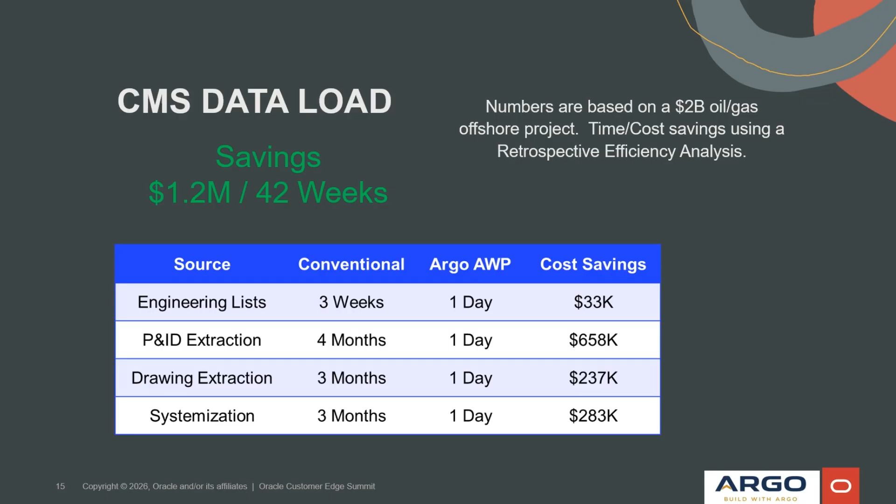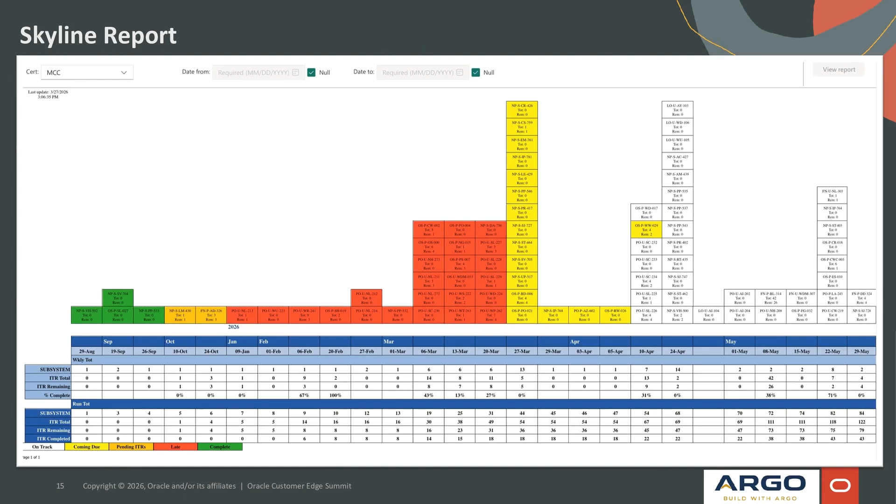Without our solution, the commissioning team is performing daily walkdowns of the upcoming subsystems, attending construction meetings, and meeting individually with the construction team to assess the condition of the upcoming subsystem. Reports like the Skyline report are essential and still necessary, but they do not provide insight into the construction progress. They're just a static view of what needs to be done.

By using our unified solution, the majority of these tasks become simple data interrogations with reports like this subsystem readiness report. Now, the interface time between construction and commissioning becomes about resolving any roadblocks that were discovered with these reports. A much more efficient use of time.

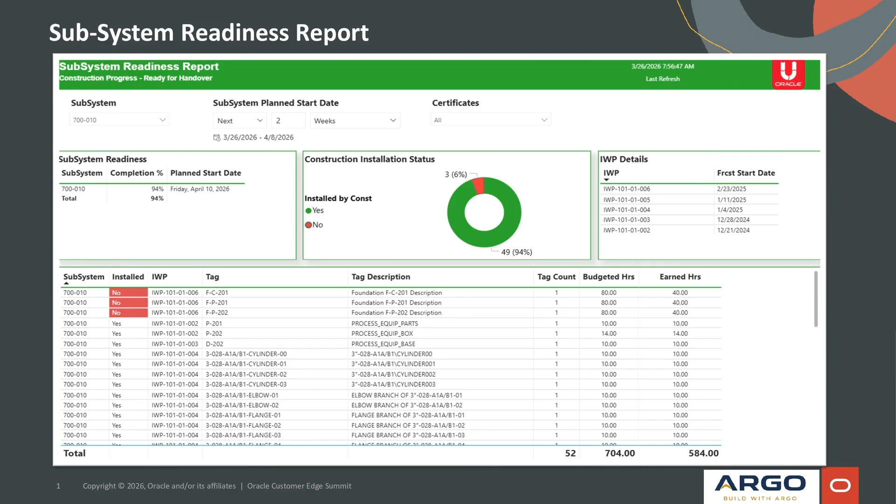We can switch over to the model view now and isolate these tags. As a turnover coordinator, we already know the 3 tags we need to discuss, where they are in the facility, and how far along they are in the construction process.

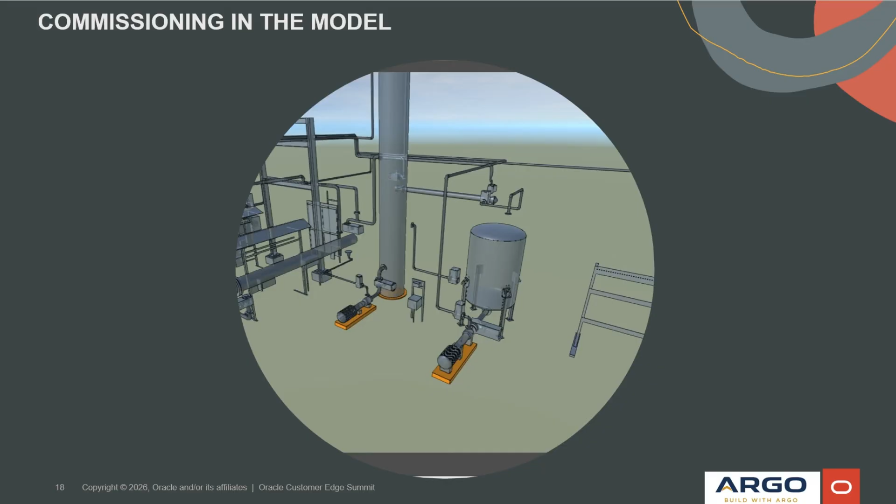This means our meeting with the construction counterpart is quick and direct, and we can both get back to work. This is a two-way data flow, so in addition to seeing the commissioning status in Tracker Check, the information is also pulled back into Unifier and displayed in the model for near real-time visualizations of the commissioning status, which is visible to construction and to the client.

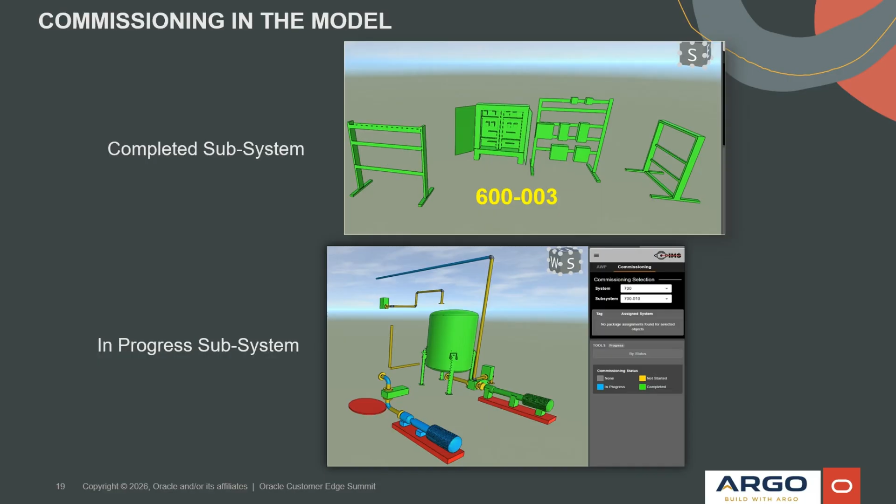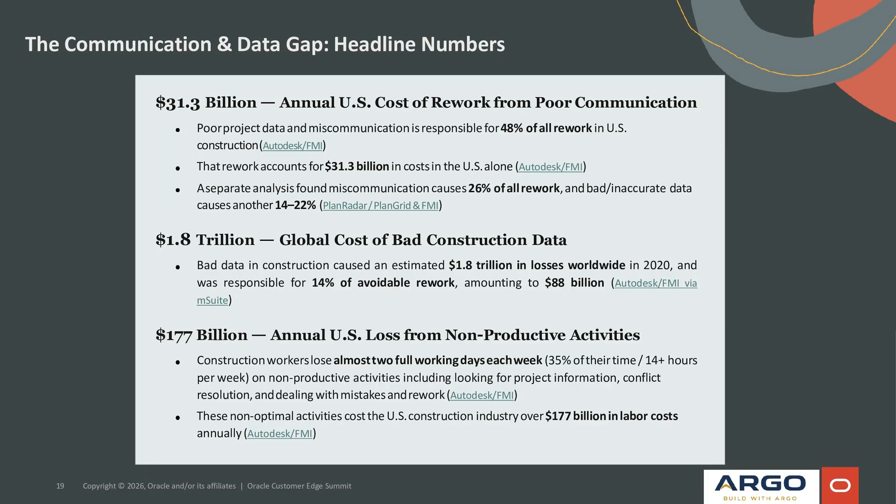In the end, this is the biggest benefit with a consolidated package and the driving force behind our decision to unify our products. Lower costs, head off problems before they start, common data, repeatable workflows, and a team environment working towards a common goal, all of which de-risk the project for the owner, which is a win for everyone involved.

Now let's take a look at the commissioning data from both the AI and model perspectives. Let's start by getting a high-level view of commissioning progress across the project.

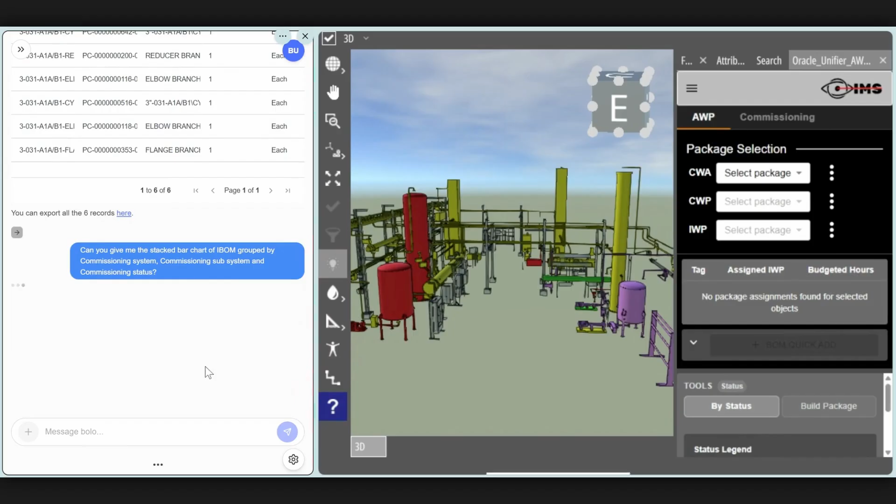We can ask the AI, can you give us the stacked bar chart of IBOM grouped by commissioning system, commissioning subsystem, and commissioning status? This gives us a clear view of how work is distributed and where we currently stand across the different subsystems. Now let's focus on a specific subsystem to understand this in more detail.

We ask the AI to give us the list of IWPs, their forecasts, and the actual dates associated with subsystem 700-010. Here we can see all the work packages linked to this subsystem, including their planned and actual timelines.

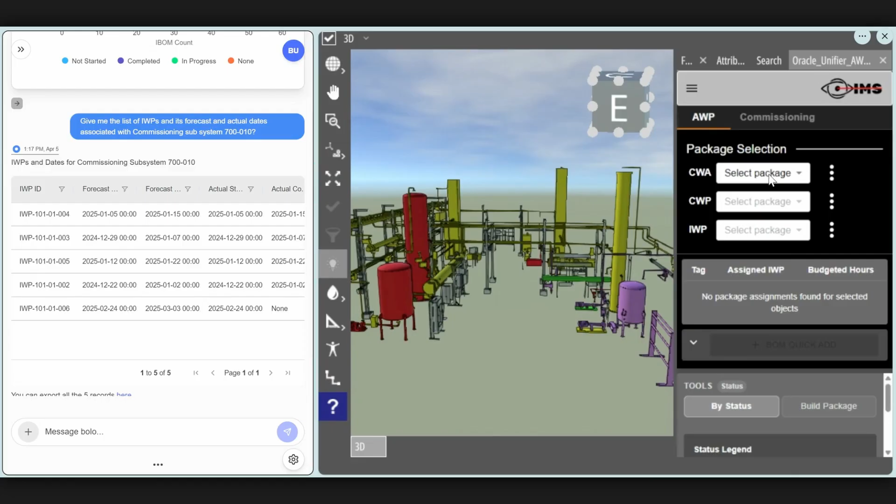Now let's look at the model for the same subsystem. We click on the Commissioning tab and select the system. Once we select the system, it highlights only the materials associated with that system. Now let's select the subsystem. Let's zoom in a bit. As we can see, the different colors represent different statuses.

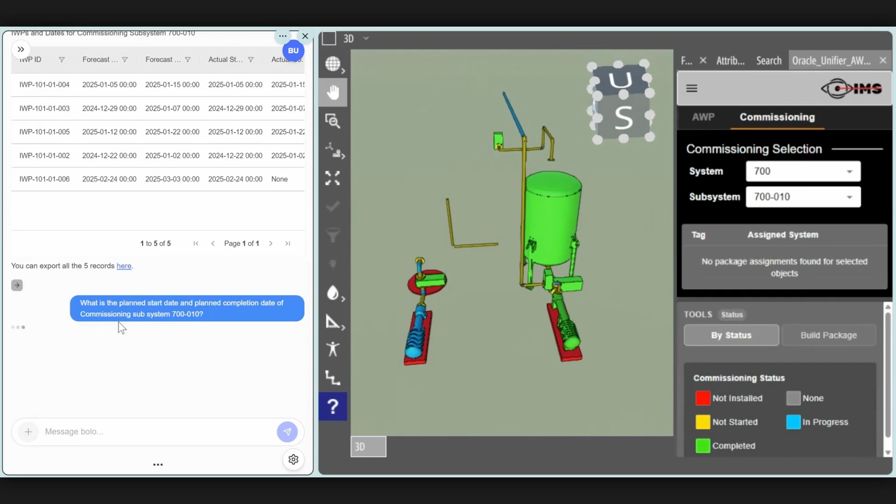Now let's look at the planned schedule for this subsystem. We ask the AI to give us the planned start and completion date of the subsystem. This gives us the baseline against which we measure performance.

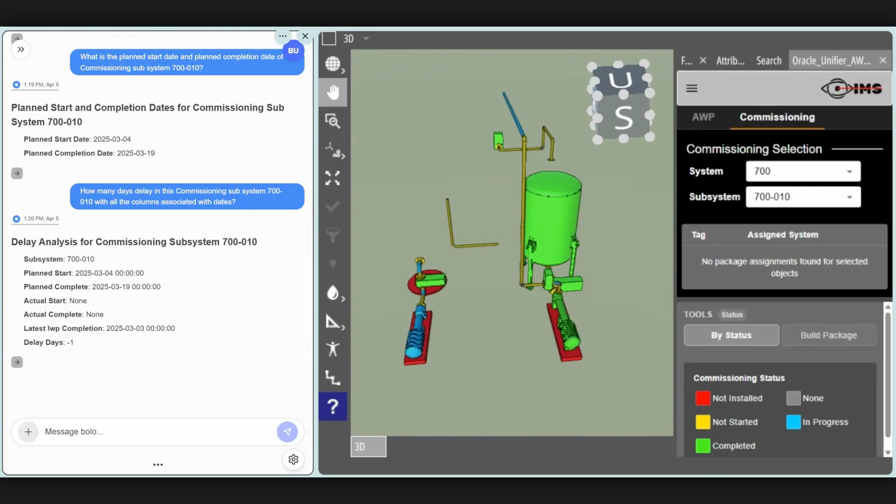Now let's check how we are performing against that plan by asking the AI how many days of delay are in the commissioning subsystem, along with all the related columns. As we can see, the planned start for this subsystem is 4th of March 2025, and the latest IWP completion associated with the subsystem is 3rd March 2025, so we are on track.

There is no delay. Now let's take a look at another subsystem within the system. As we can see, none of the materials have been installed yet. Now let's ask the AI the same question, but for this subsystem, which is 700-008.

As we can see, the planned start for this subsystem is 20th March 2025, and the latest IWP completion associated with it is 9th April 2025. That means we have 20 days of delay. This gives us an immediate view of schedule performance and highlights where attention is needed.

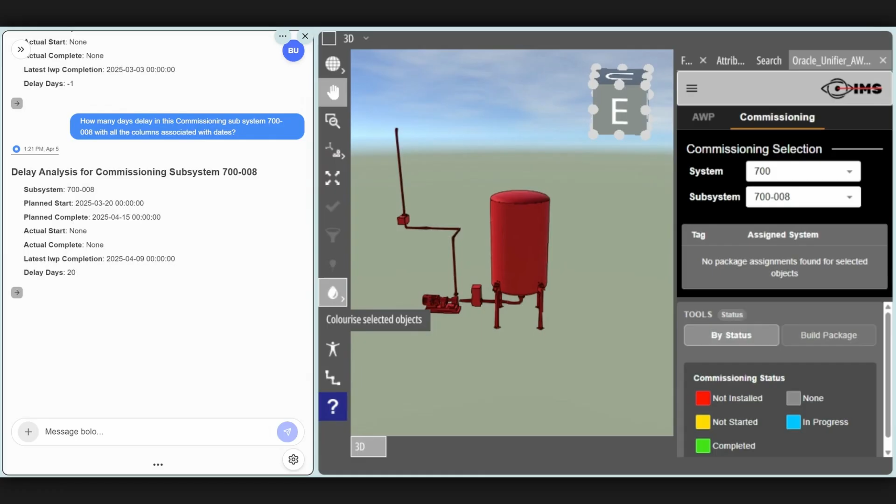What we have seen here is how the AI can quickly move from a high-level overview to detailed analysis. The 3D model adds clear visual context, helping teams make faster and more informed decisions. This is one of the most powerful features of our ARGO AWP solution.